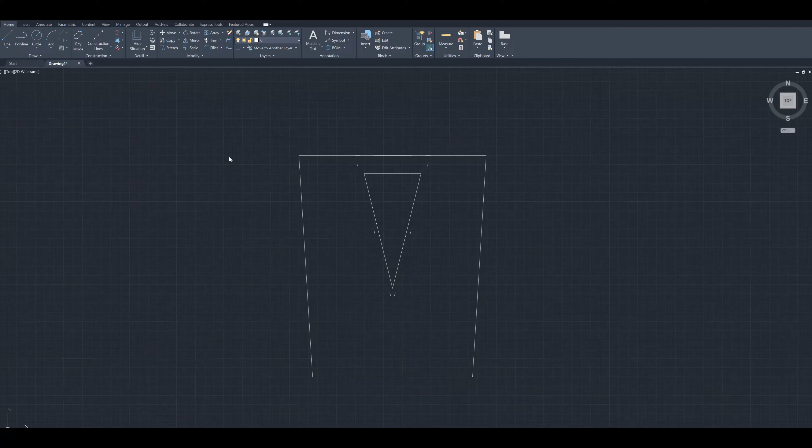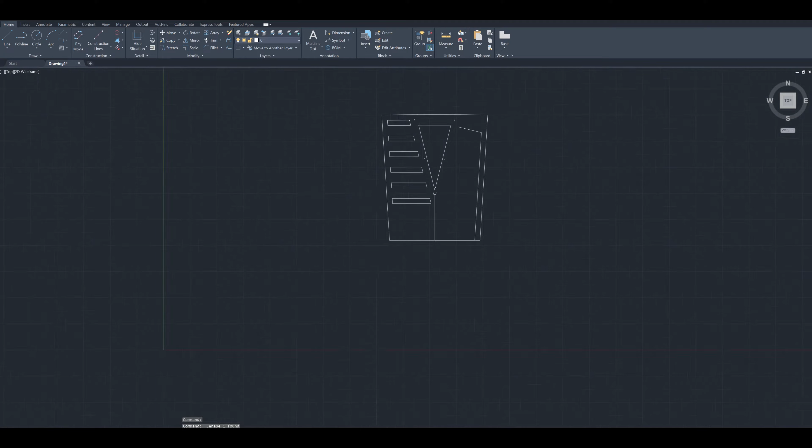In this episode, we are starting to design our engine intake cover. I'm doing something a little different - I've learned how to screen record now, so I can show you guys how I draw my stuff in 2D CAD and turn it into a cut file for the plasma.

So this is my first mock-up drawing. The outer dimensions are correct, I'm just playing around here, and we've got some gussets here we're going to put in between - same thing, a little jigsaw puzzle that we like doing lately. It seems to line up a lot better and helps with the building process. We've got these little slots here they're going to slot into, to line up and tack weld all of them.

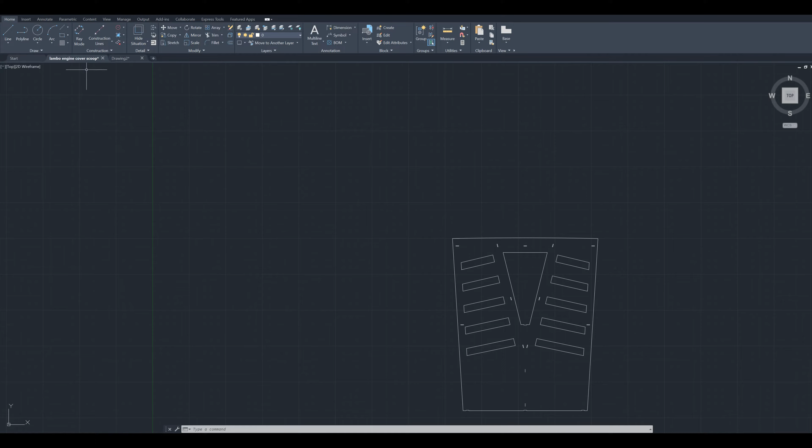This design with the vents and the intake is obviously the first drawing - I had to start somewhere and get something happening to figure out if I like it or make changes. So see on these, it's curved on top so that's going to follow the roof contour, the curve, and then it's flat on the bottom. I think we could have done a flat one and just curved near the roof, but it wouldn't have looked great, so it's got a nice curve on it - it'll look more professional. But I don't like this triangle intake, so I changed it.

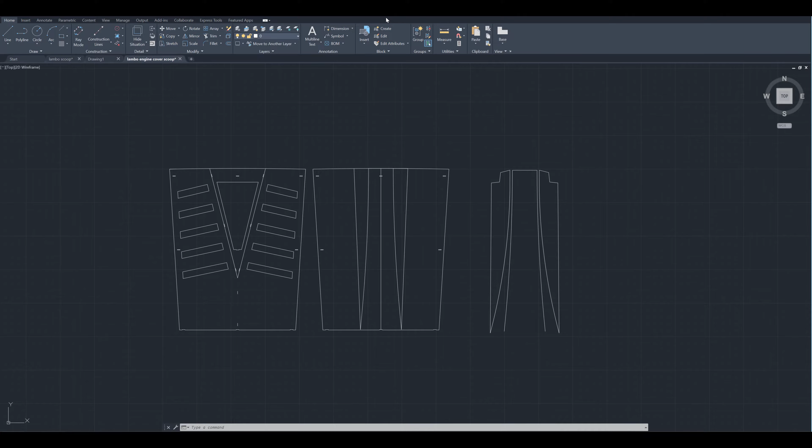It's going to be longer and more rectangle, and I'm going to be able to use these for the water-to-air intercooler, plus our air filter, which will be on top of the engine - that's what I'm planning on doing. So it'll be fully functionable, but this is where I'm at. I'll design something up a little better, but we'll get on the FastCAM and turn this into a cut file, into a TXT, and get it cut.

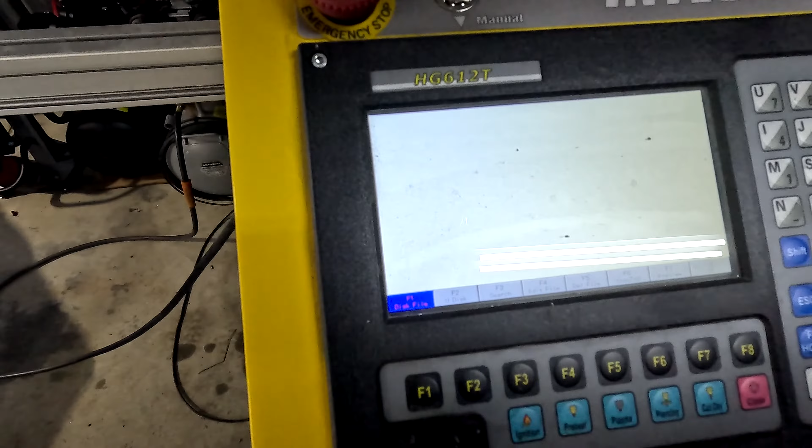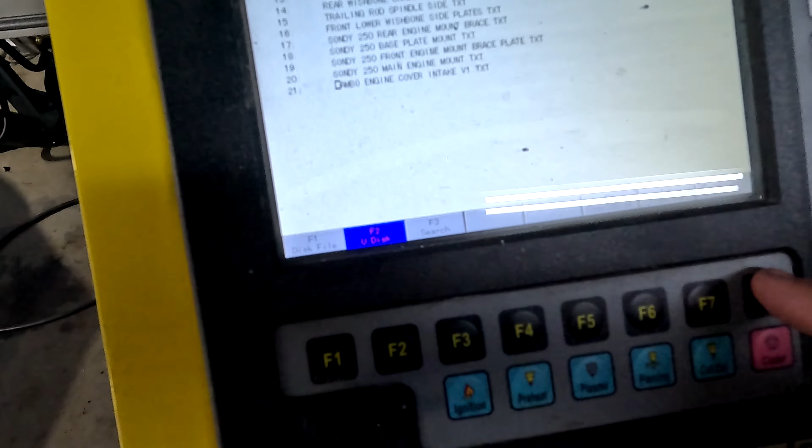Ooh, we gotta find it. Lambo engine cover intake version 1 - that's what we want. Let's have a look. Ooh, there it is.

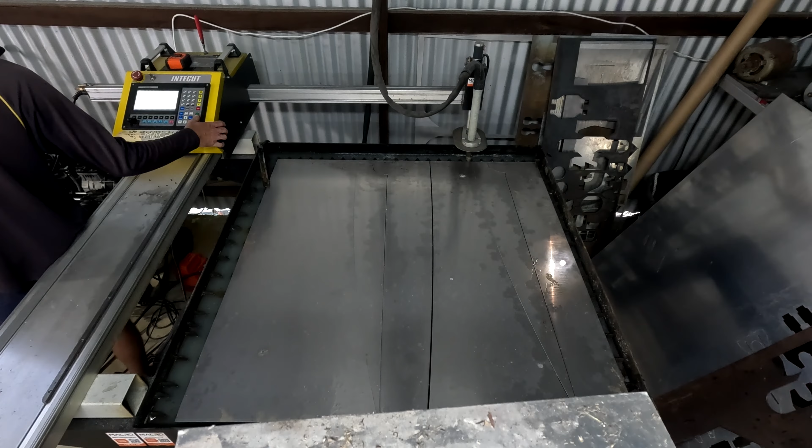Alright, so my table is only 1200, so we're trying to get the maximum out of what we got. So I did make a boo-boo, but nothing went to waste, okay? You can see the plasma cut outside what we needed, and it just looks like a big mess up right now, which it is.

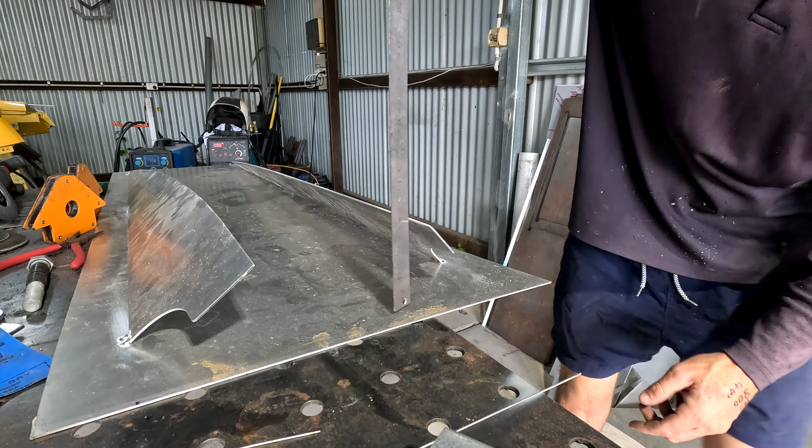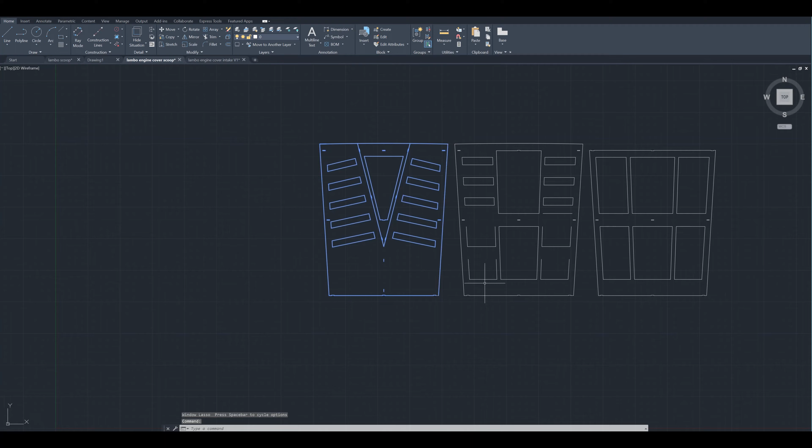Okay, so let's go back and get rid of this original first drawing, because it's no good - it doesn't look good at all, so we'll get rid of that. We've kept the same outer dimensions though, that never changed. So this is the new version - this is the top and the bottom.

So these are our little vents, and these six openings on the right are for the vents, the middle is for the intake side. This has got a slight radius on it to match the roof, where it goes into the roof. So I'm just going to finish off designing the vents, double check that all my measurements are correct, where the gussets are going to line up, and we'll get this thing cut out.

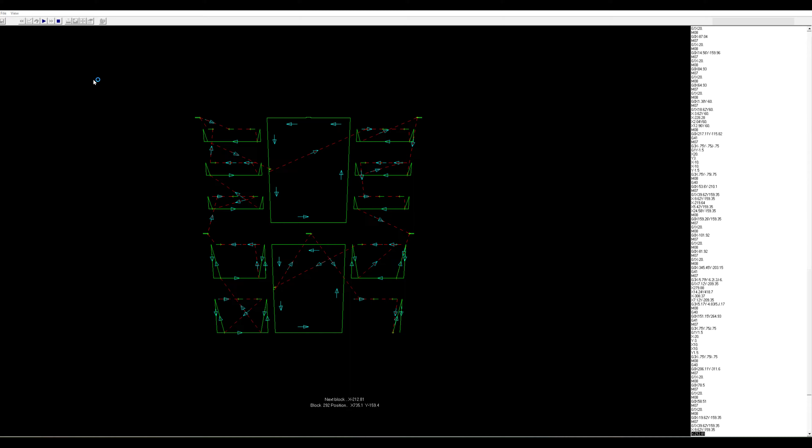Alright, so back on the CNC plasma, just had to change the new electrode and the tip. I feel like aluminum wears through the electrode and the tip quicker than normal steel, I feel like - don't know why. Maybe conductivity, I don't know. I am still learning.

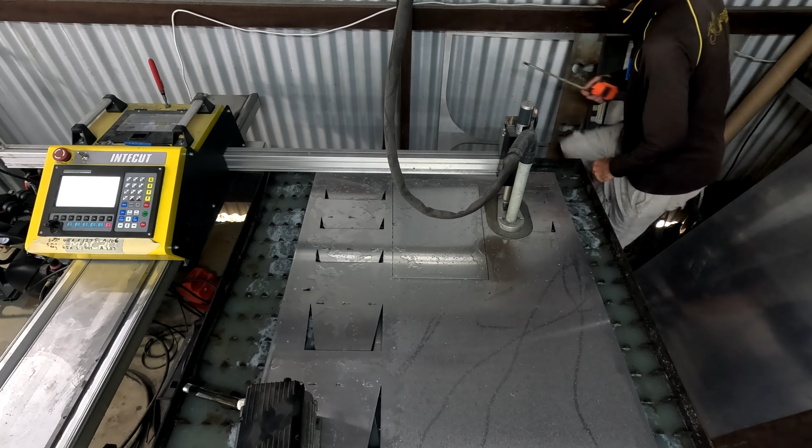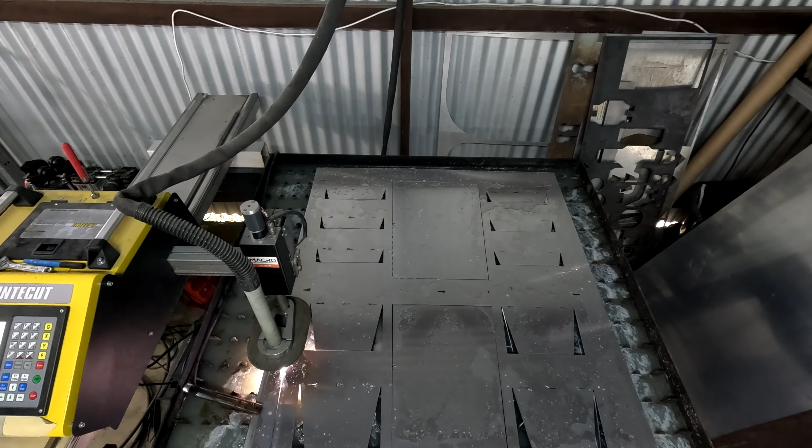I'm learning right now as we're cutting, always trying to make changes to settings to get it right. I keep having to stop also, just because my power keeps dropping, so I've got to build up the air compressor without the plasma running. Last week I was doing something and it tripped and I stuffed up my whole piece, so I've just been trying to charge the air, then do the cutting - this was very stressful.

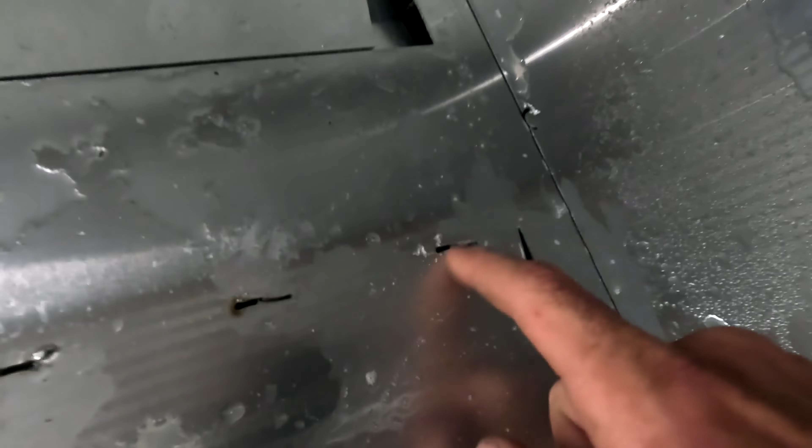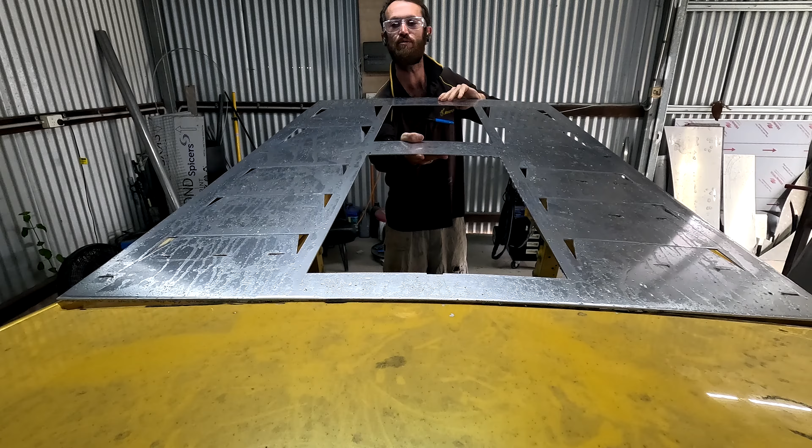Raw dogging it. Whoa, definitely need something to put there. There's my measurements. Whoa, no way - nailed it. This fella will go here, obviously.

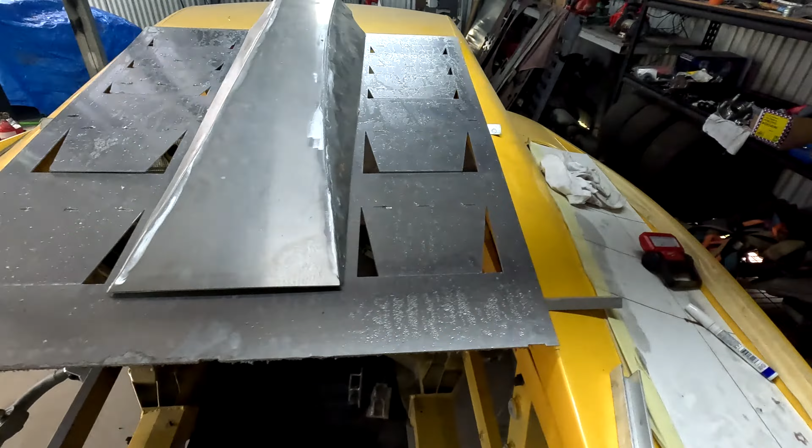Need something to hold this. Oh my. Oh, once this is all folded up, we're gonna cut out some little corners so they're gonna be like little shapes on angles. Oh wow, oh my lord. I'm pumped, if you can't tell - this is so cool.

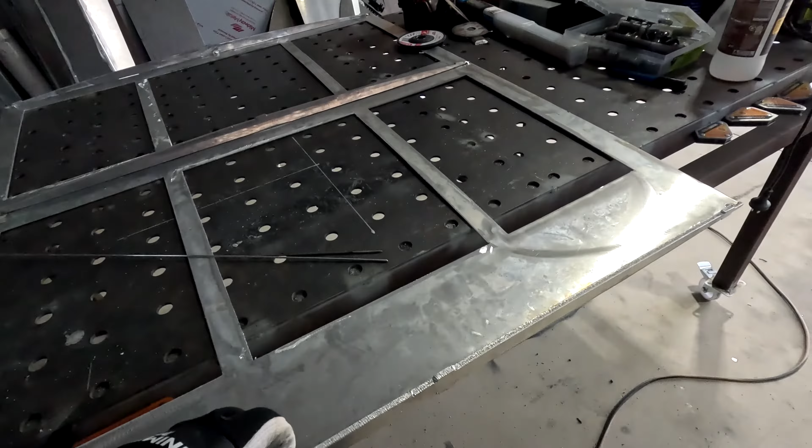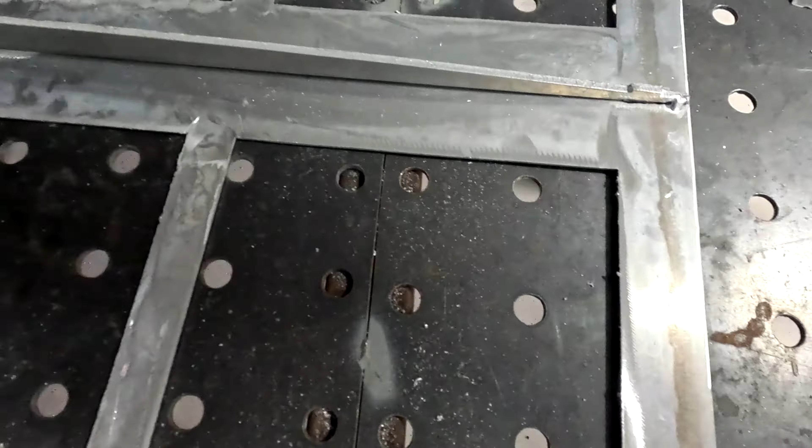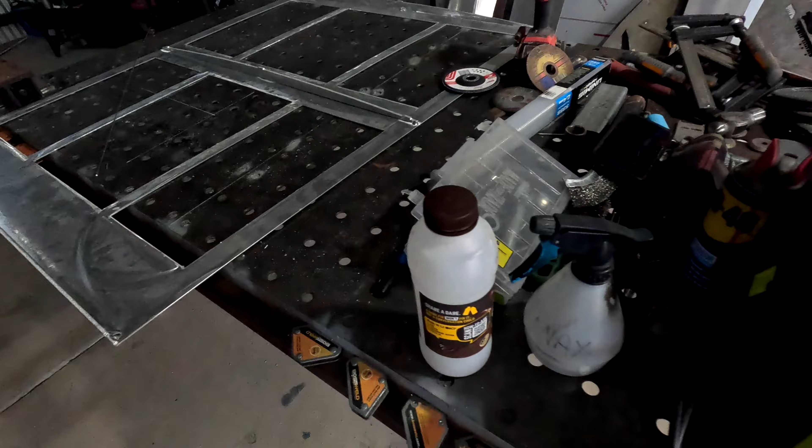So here is our gussets. It's got that 25mm ridge. I just tacked them in place, and then I've got to clean up the top. I just don't know how I'm going to put this together.

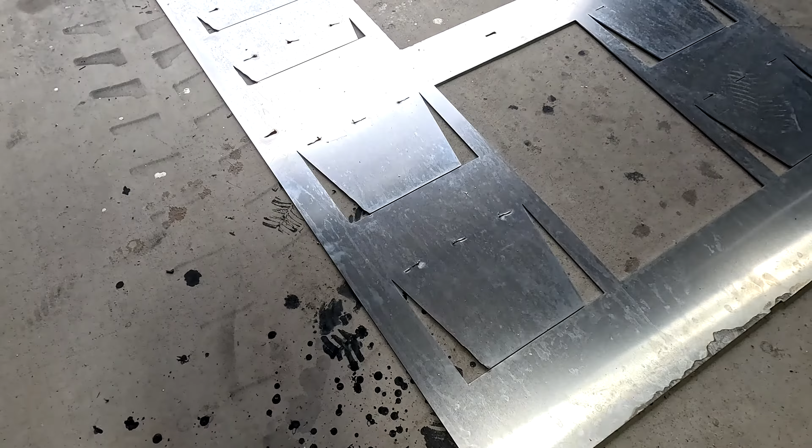I'm going to be able to weld everything, like the fins here. I think it might be tricky to weld inside once it's sort of on that, maybe. I mean, I can just tack it, and then I could undo it, I suppose.

Because I'd really want to, in this episode, get it sort of pretty well, like all the vents folded up, the scoop attached, tacked on there, so like properly mocked up. That would be pretty cool to get that all done in this episode. So just gonna clean that up, get it ready to sit on here and see how it goes.

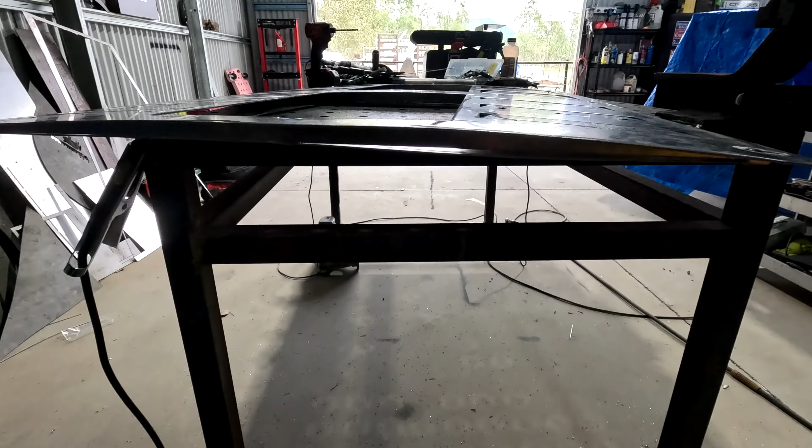So you can obviously see the curvature that it's going to have, and that will follow the roof curvature all the way back down. That'll be pretty cool instead of it just being flat, because it'll look more meant for it, I think, if it's got a curve and not flat. It would look patched if it was flat. So I think a nice curve to match the roof would look sweet.

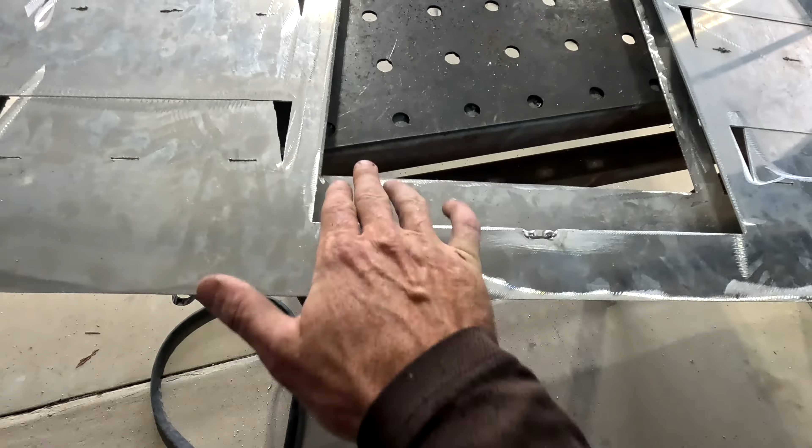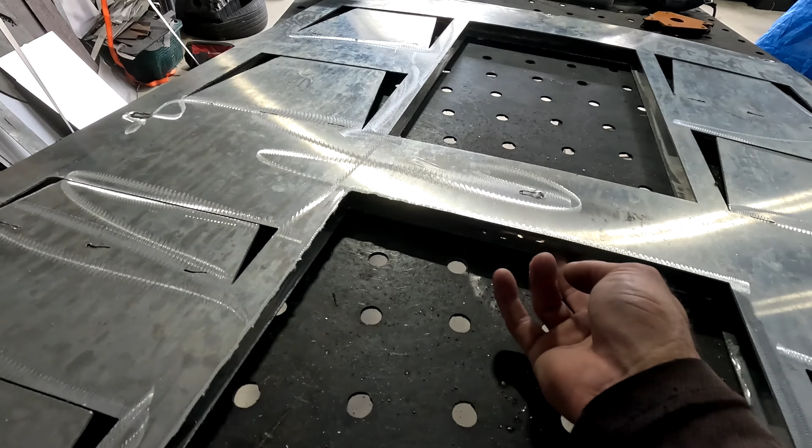Yeah, this is gonna be tricky, all this sort of stuff. I've got to make a bit that comes down for the intake here. I've got to weld in some bits on the edges to support that, and through here, so support all this all the way through so it's boxed in.

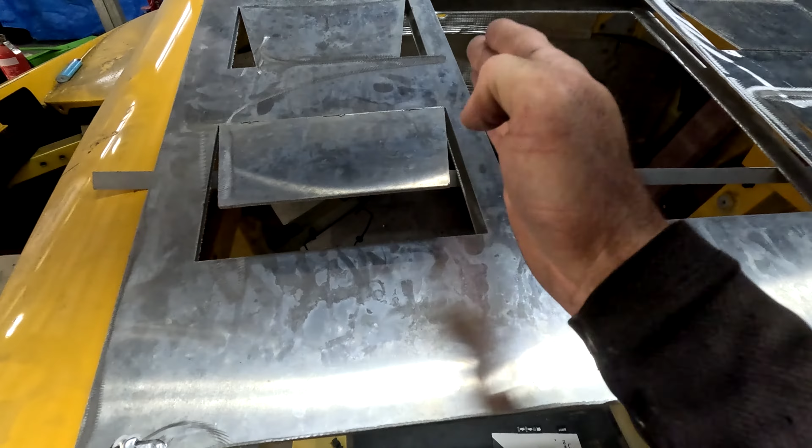Awkward. Oh, it's gonna fit. And I thought it would look really sweet on an angle instead of just square. So that's going to come up like that, and that's going to come up, and I'll weld a little triangular piece in there, get them all the same, so they'll all sit up and that'll look pretty cool.

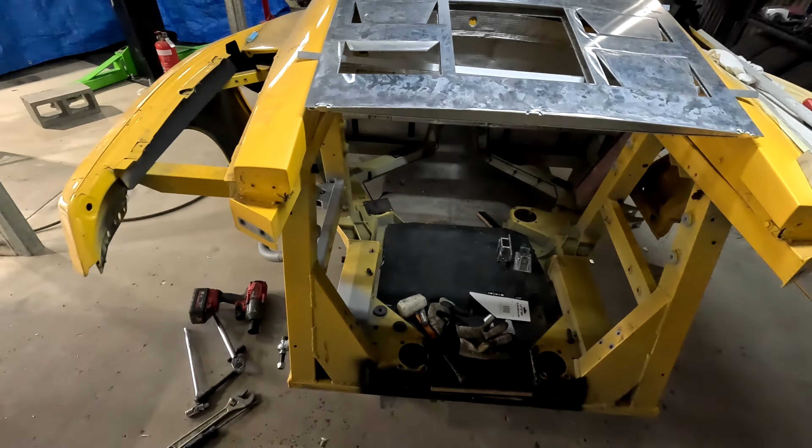Yeah, I made the backs bigger and the fronts just to make it look a bit better. There's the curve. Oh yeah, that curve's going to be really good. The curve is going to fit in there real nice. But it's still not 100%, but I think by the time it's all done and sanded and primed up, it's going to look shit hot.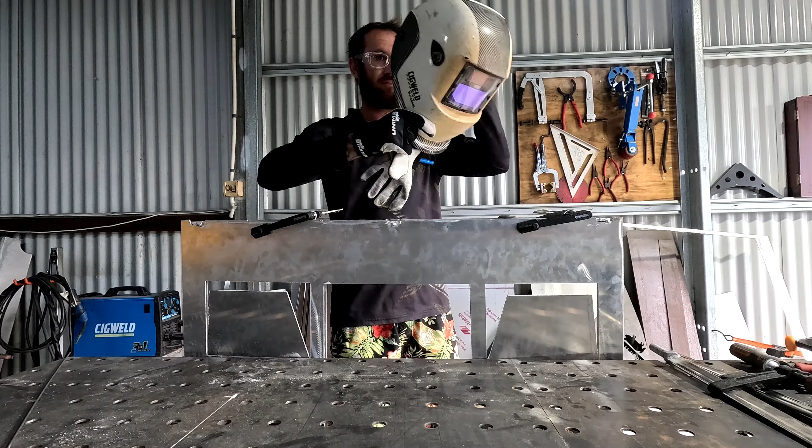ticky-tacks, tick-tick-tack, tick-tack.

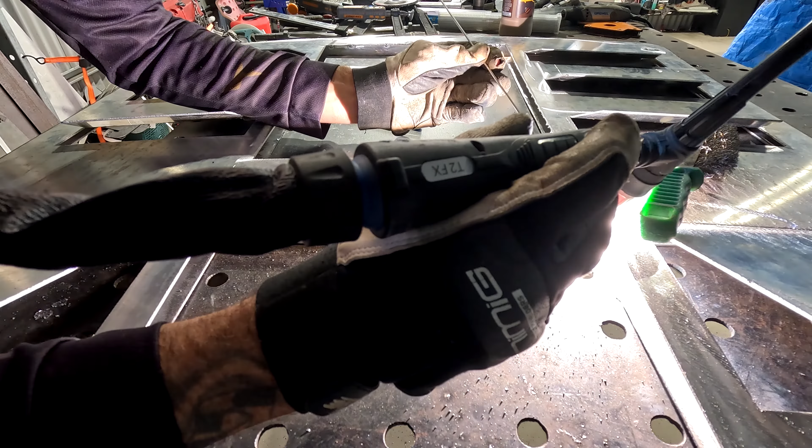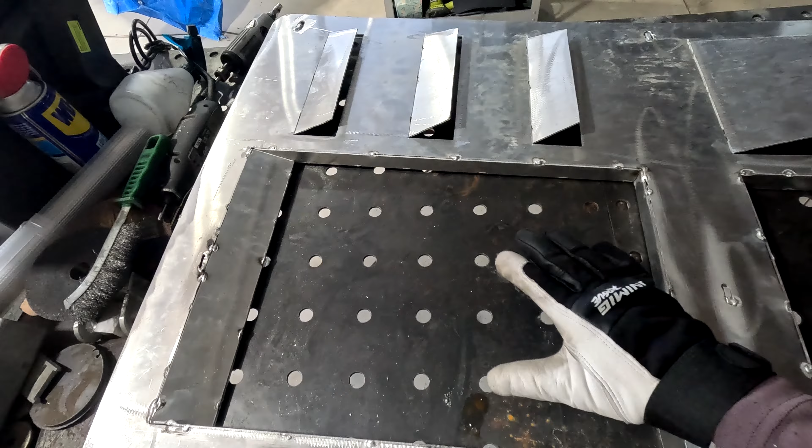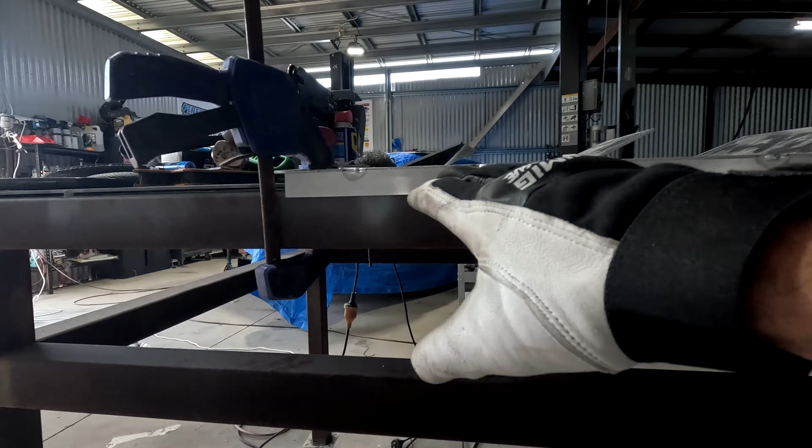Alright, we're getting there. Tacked all the insides in. That's pretty solid now, all the center. Just got some angle, some 3mm angle, and now we've got this. It started to sort of bow a little bit because of the heat, but we got that nice and straight. I've just pinned it down, so I'd rather it have a slight bow upwards than down.

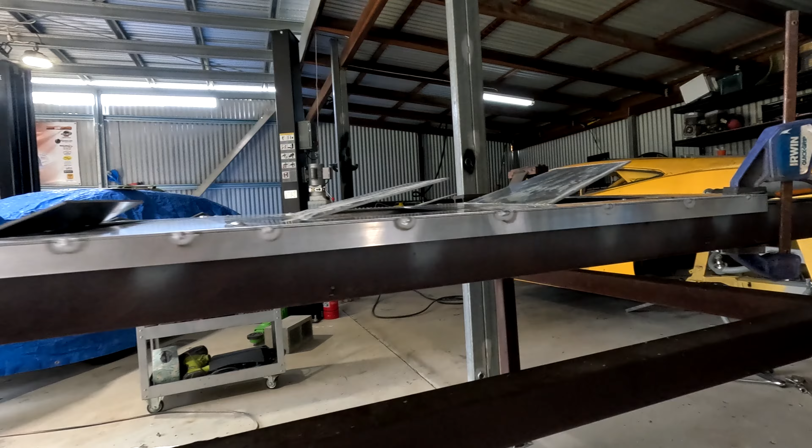So just clamped it, I'm gonna let it cool down. The gap is pretty sweet, bugger all there. So that's gonna stiffen this, so that angle slotted in between these, the top and the bottom, it slipped through and then joined, and then I can put some tacks on the other side too. So yeah, that'll make it solid.

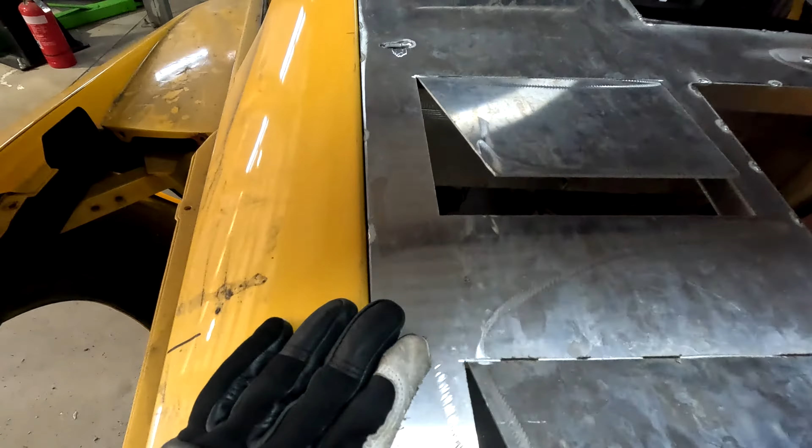I just want to show you the body lines. That's better. Like, it's pretty schmick. It's fairly consistent. Like, it must just come in just a smidge here and then it opens back up.

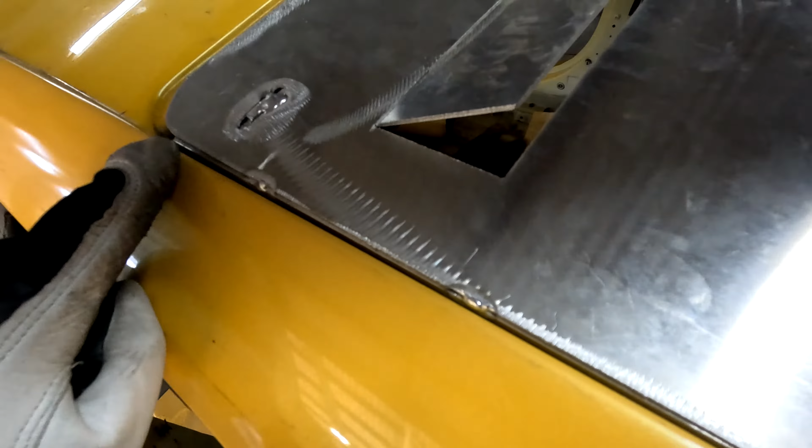But I don't know. What do you reckon? I think it's pretty good for a race car. I don't want to say that too much because I really want to do a good job with this, but you can see clearly here where it sort of touches, but it's going to be a very small gap, so that's good.

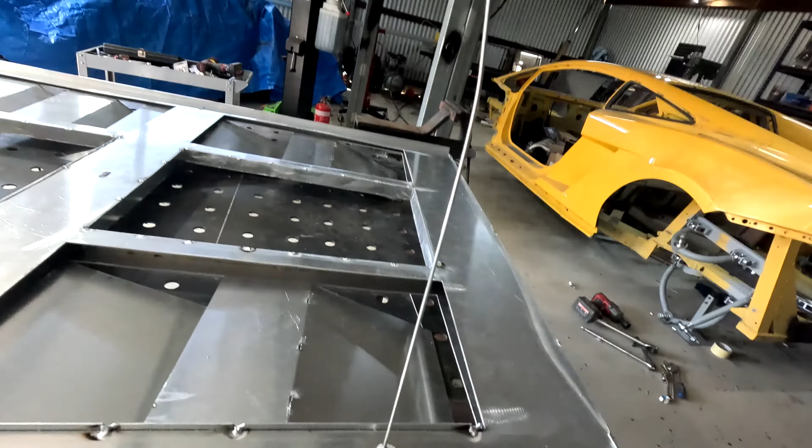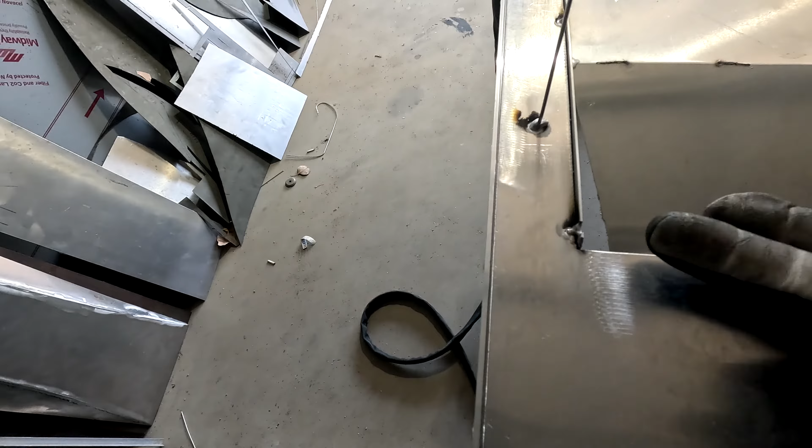Quick tip, if you're doing some aluminum really fiddly stuff like a Lamborghini engine cover, you might want to know this tip. So 2mm alloy, it's bending with heat, so try and get this all the same height. This was bowed down because it's boxed in now. I can't get in there to pull it up, to level it, so just tack on a big bit of filler rod and pull it up while it's warm.

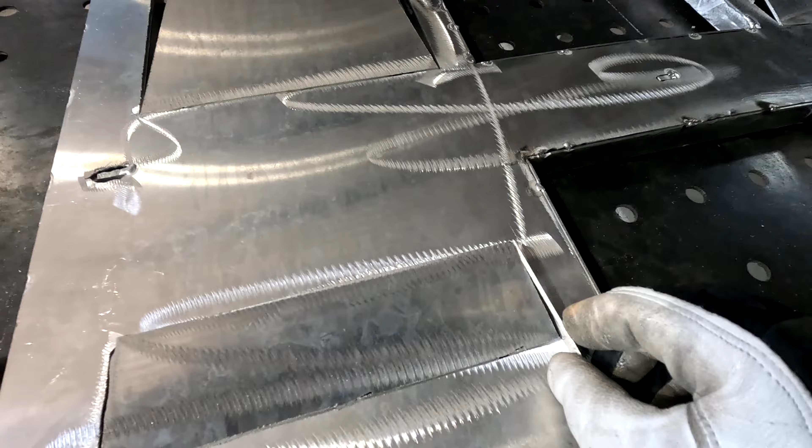Like, I'm trying to, it's going to be harder work for me, more intricate, more fiddly and really hard, but I think it'll look even better. Let me know what you think. Let's do it on this one, so you'll probably see it better.

So that's going to go there, that's going to go there, roughly. Obviously they're going to be straighter than that, but do you think I should run them on every single one? It's like the air will, it'll help a little bit, but mainly it'll just look cool.

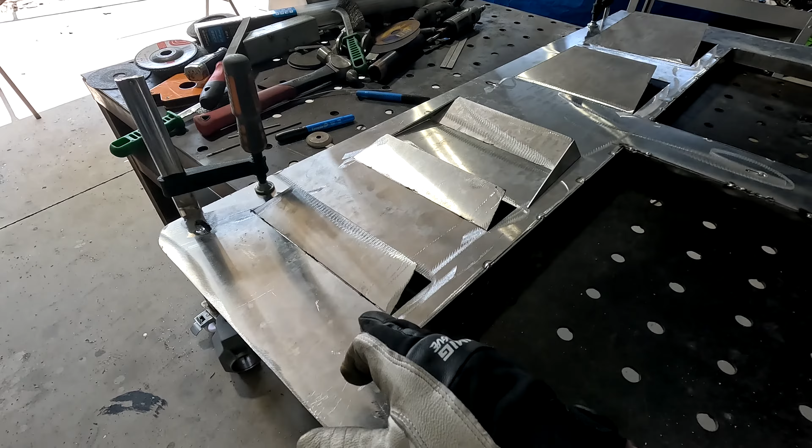But I feel like the air won't, they're like end plates. So when the air hits, it's hitting here and it can't, so then it has to go up here, which will build up a high pressure, which will then create a low pressure for vacuum, and then the air in the engine bay will then come out. So I think they'll be beneficial.

I actually think they'll work, but that's a lot of work. Got a heap done in 2 days.